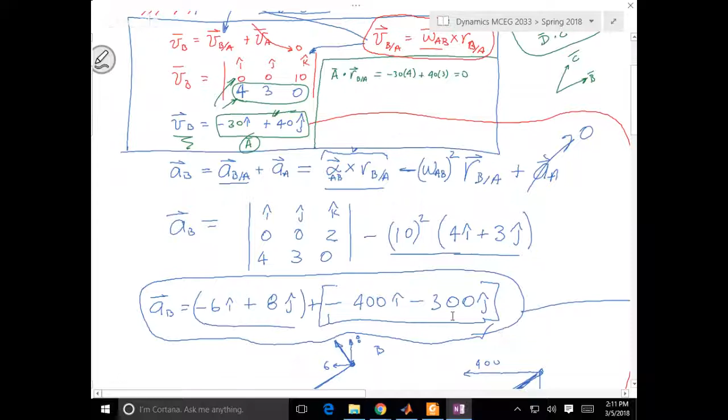Now, I kind of regret picking omega to be 10 because that made these numbers big compared to these, but it doesn't matter at this point. So the next key is I have the acceleration and the velocity. Of course, I got to put them together. But I got the velocity and acceleration at point B. And since B exists in one link and the other, it can be used to work on the second one.

Now, what I did is I selected all this and recopied the exact drawing here. It doesn't look good, but one of the things I'm going to need is the vector that starts at B and points to C. The way I did this is it's 4, 3, and this is 15 over, but it's aligned with this. So 15 minus 4 gives me 11. And if it went up 3, then to go back to 0 it has to come back down 3. And so you have a vector that draws from here to here.

So then I said, okay, velocity of C is equal to velocity of C relative to B plus velocity of B. That I pulled up from before, Friday's thing. Then I said, wait a minute, omega BC times R C to B. Now I could do this instant center, and I kind of drew it right there, but we'll scroll it up in a minute. For the time being, I don't know what omega BC is, but I'm going to assume positive. X to Y gives me Z. I'm always going to assume positive, so I put it in there. This comes straight from here.

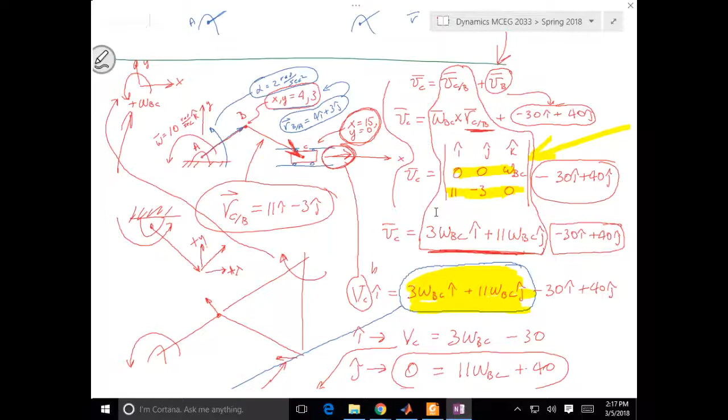Now what's funny is the physicist won't reference this back. They'll just leave it as a negative number. A physics person will always use those coordinates and spout negative numbers throughout everything they do. That's just the way they do it. And then I took this, stuck it in there, pulled it down here, figured it out, and it's going minus 40, which is going back. So if this thing's going that way, it's pulling that thing that way. So physically, it makes sense.

So we got omega and we got the velocity. We don't particularly need this one in the next phase, but we do need that one. Because now I want to find the acceleration or the alpha of that link, and I want to find the acceleration of the piston. Actually, that's kind of important because F is equal to ma. If that thing is pulling it back that way, you just multiply times the mass of the piston.

Now, okay, you and I both know there's probably going to be a force due to combustion pushing that thing back. But if it was just being pulled back by this crank, like a compressor, say, there might be other forces on there. So the next step was I went in and I said, let's do the acceleration. And did I redraw it? I don't think I did.

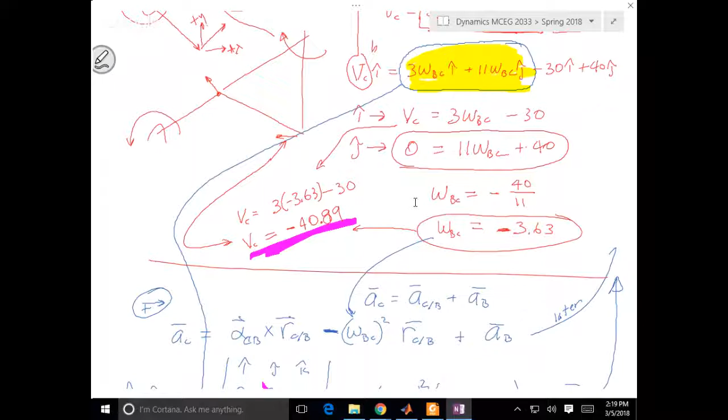But I could put these points on this thing. I could say this is A, this is B, this is C. Now, that helps a little bit. Acceleration of C is equal to the acceleration of C relative to B, this one, and so the alpha will come in and the omega, plus acceleration of B, which I have not here, but the line up there above. I didn't want to copy it down, so I just said, I'll add this later.

And so then I realized I should have put this equation over here. So the acceleration of C is equal to alpha BC or CB. It's just the alpha of that link. That's basically whether the link is spinning up or slowing down. It's going at omega; is it going faster or slower, meaning it's accelerating. This one is the centrifugal part, and this omega BC is something we found there. I don't care whether it's plus or minus. That part's minus. This is squared. Doesn't matter. This vector is the same vector that was up in that last problem.

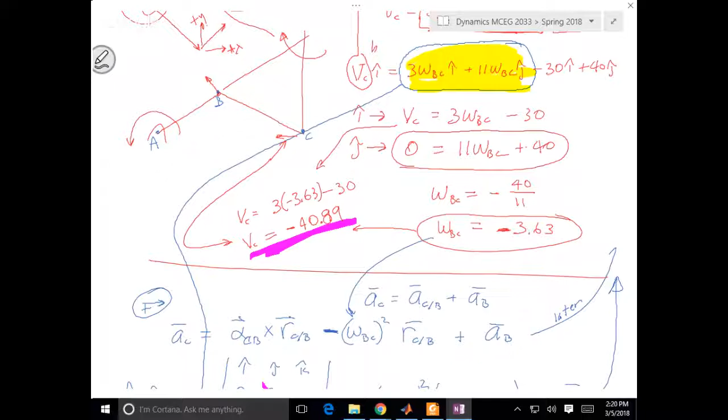And this is why I like doing it this way. Let me shrink it down, I can show you. If you shrink it twice, the typeset gets kind of small, but here's what I like about this. So I've got to do this alpha R. Oh yeah, there it is. So this one looks a lot like that one here. I broke this, but that's okay. As a matter of fact, the omega's here, but alpha's there. That one's exactly the same: 11, minus 3, and 0.

Me, I'm a big proponent of: if you can find a way to make things simpler, do so at all costs, as long as you don't give up your ability to do things. I think this widens your ability to do things. So I said, I know if I multiply this one out and that one out, this is going to look a lot like that one. So why don't I just copy that down, change that to alpha BC, and that's exactly what I did. 3 alpha BC i, 3 omega BC i, 11 alpha BC j, and 11 omega BC j.

I just copied it. Now, this part doesn't. So I stuck this in here, squared it, then multiplied times 11. I threw away some digits. In the middle of it, I thought, wouldn't it be great if everything came out to be an integer? But no. So I got this one, plus that one, and it turns out that's roughly 39 and a half. There were some more digits. And finally, I copied that.

So then what I did, all you do then is you just say, okay, I'm going to extract the I's, 3 alpha, 145, and the 406. And I think I did this right. So 5, that's 11, 4, that'd be 5, and then 5.

Okay, so this one, so you got two unknowns and two equations there, but luckily J has nothing over here, has this right there, and then the 252. So I took that. I hope I did that right. So it's minus 252 is what I got. Then I swiveled around there and ended up with two very interesting numbers.

And what I ended up with is alpha being, well, it was 23. I think it was 22.8 or something, so I just made it 23. And then I stuck it in this one. So I took 3 times that minus 551, which ends up being minus 482.

Now, this is where I stumbled a little bit. Here's how I stumbled, okay? So I assumed the velocity was going to the right. It wasn't, it was going to the left. I assumed acceleration was going to the right. It wasn't, it was going to the left. So both of these are going to the left. The minus sign, you got to think about that for a minute.

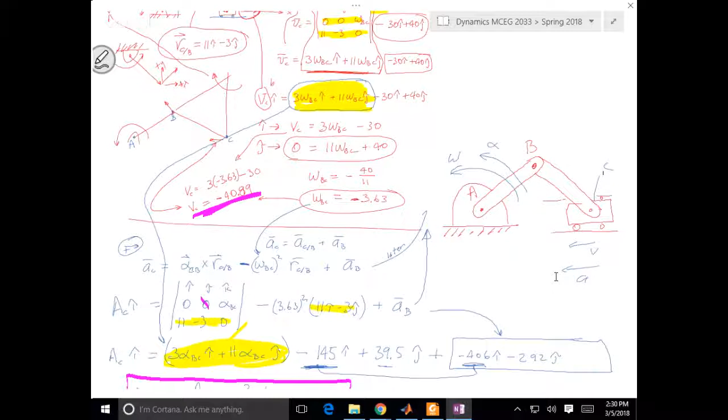You know what? You'll spend your whole life trying to get your life together, and then you find out, well, I didn't spend as much time living it, so I better just say, oh, well, crap, just go with it. I tell you, you'll be my age and you'll be still trying to get it together, and you'll be thinking, oh gosh. So it's okay. It works out. Just make sure you have fun at it, whatever you do. That's the key. Because life without fun isn't very fun. Yeah, yeah. So that's all I did there.

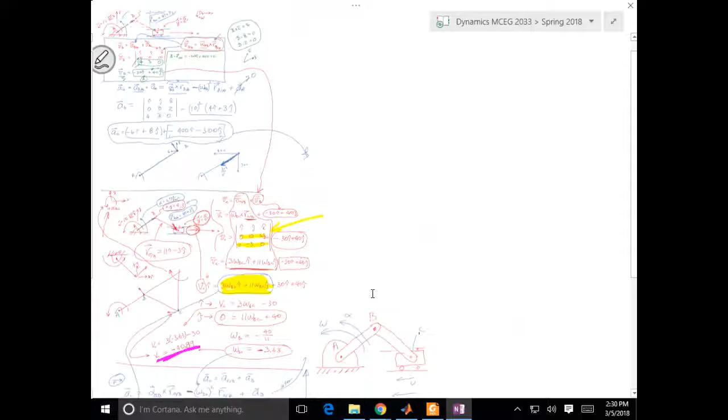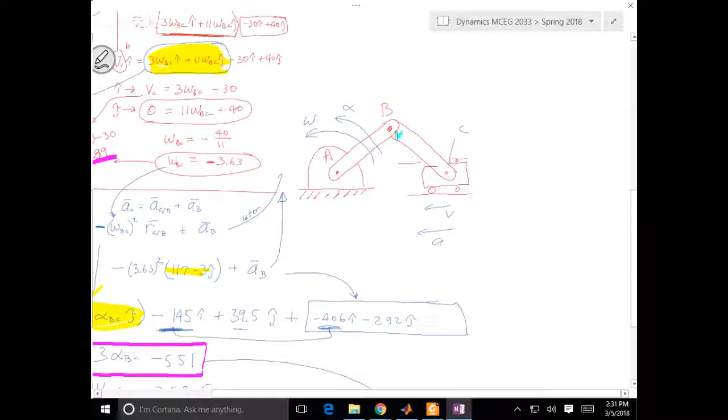I think what I'm going to do is, and I told them, now that I think about it, that's why I drew that picture right there. I was telling them I'm going to draw the picture for them on the test, but I'm going to try to make it look like that instead of my lines. I may even do silly things like this, in other words, here's one link, and then there's the other, like color code them, so that they're different links and they operate differently. So is that going to be on the first test next month, or is that going to be the take home? These will be the take homes.

So maybe I shouldn't give that test until we deal with the test in chapter 12. You know what I'm saying? In other words, split the midterm into two parts. First part be the in-class part. The other part you could take home with you and turn it back in a couple weeks after spring break. So I think maybe I'll do that. Everybody seems to schedule their time pretty well. So if I make it up, I could just give it to you and say, this is not due till a couple weeks after spring break. So focus on chapter 12 first.

Well, the thing is, no matter when you give it to us, it matters. Yeah. I would feel bad if somebody took that test and worked it for the Wednesday and didn't study for 12. So if I do it, I'll be very specific about that. I feel like at this point of the year, most people in this class know how to manage their time. Yeah. Quite a bit of it.

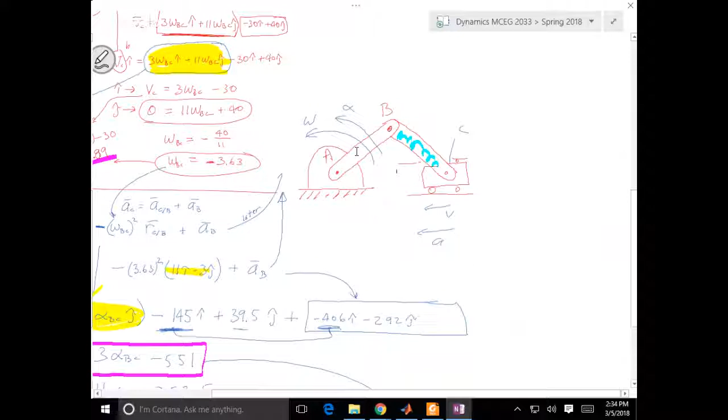So I don't know. We need that extra power. Well, mechanics of materials has two courses after it, machine components and fundamentals, and I never quite got which one comes first. But anyways, one comes first, one comes second. Oh, does it? Okay. Yeah, pretty sure I looked at the schedule for next. Oh, did you? Oh, okay.